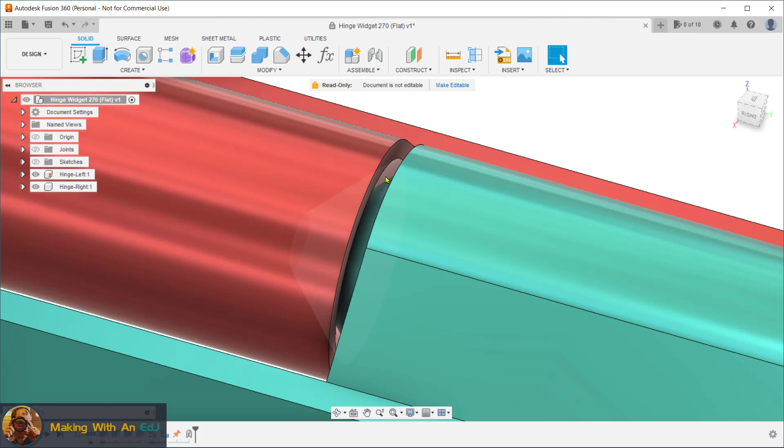The way I create the extrusions here does not actually maintain the full clearance we had set up. So the 0.5 millimeter gap we created at the top does not carry through because of how this extrusion works. If we zoom in and inspect it, you can see that even though we start with a 0.5 millimeter gap between the opening at the top, when we look at the space on our 45-degree angles with the extrusion and the cut...

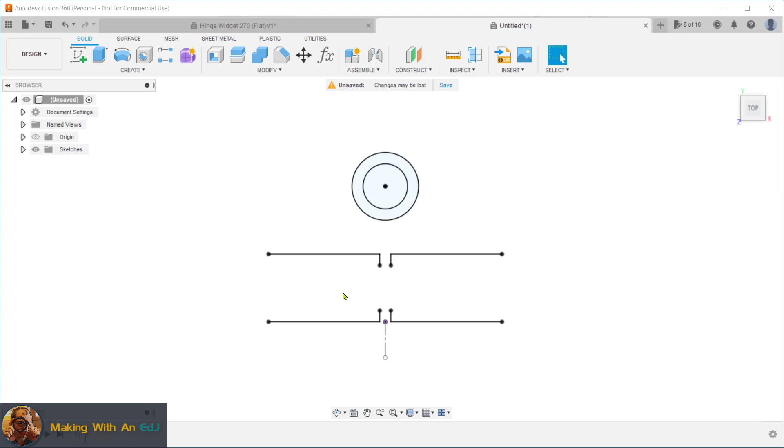Let me show you. I'll open a new design here and do a quick sketch to demonstrate. I've prepared a simple sketch to show how this works and what's happening with my original design. I increased the size to make it easier to see what's going on. So let me go in and edit the sketch, and I'm going to zoom in a little bit here.

So I mocked up just a 60 millimeter circle, like you remember from the other model. This is how we would extrude from this inner profile to create both the pin and the cutout for the hole where the pin would insert. Both of those were cut at a 45-degree angle.

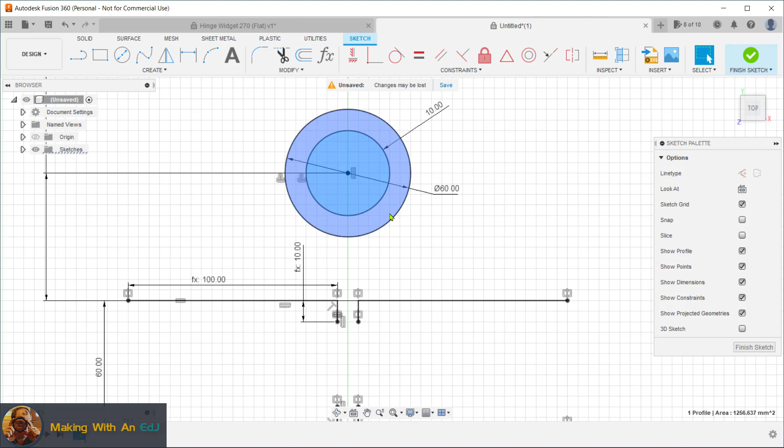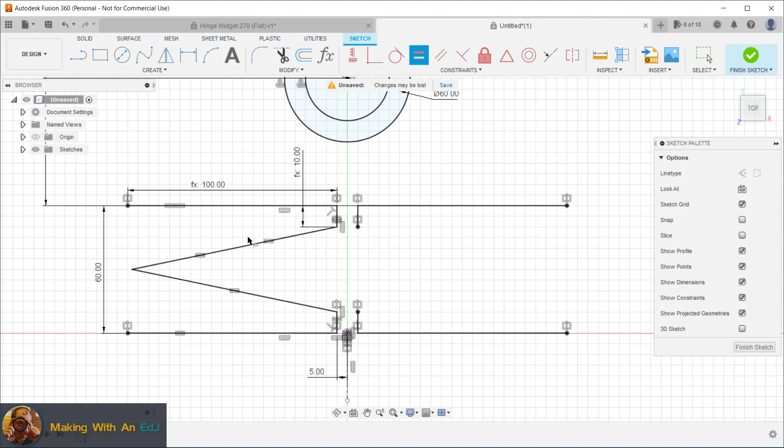So if we look at a side profile of what that would look like, I'm going to turn on the line tool and draw the cutout portion. I'm just going to draw lines here, and make these two equal. Then I'm going to set the angle to 45 degrees. There we go, 45 degrees.

Now you can see how it created - we have our 10 millimeter clearance on everything here. I've got a 10 millimeter gap created here, and a 10 millimeter inset on that face that matches the circle up here. So now to create the pin, the extrusion essentially took this inner circle, which would be from here to here from a side profile, and extruded it out, similar to how we made the cut.

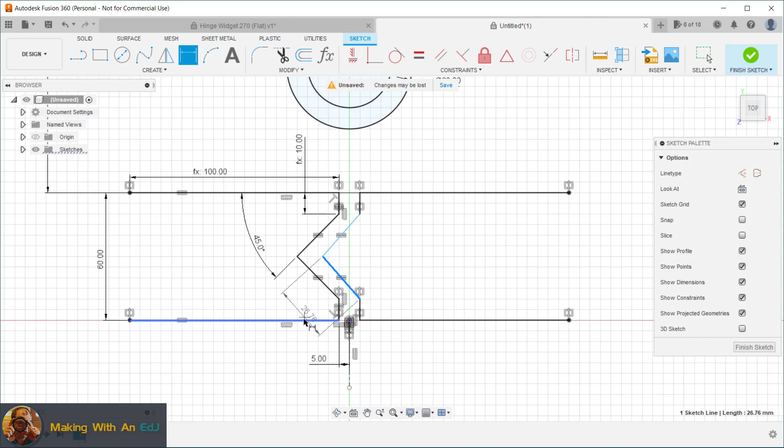So again, I'll constrain these by making them equal and dimension this angle. Actually, I'll do it down here this time, keep it a little cleaner looking. We're going to make that 45 degrees. If you notice, you can kind of see it visually because it's exaggerated, but the distance between these two points - I can turn on the inspect tool - is 10 millimeters. But if we look at the distance between these two parallel lines here, it's 7.071.

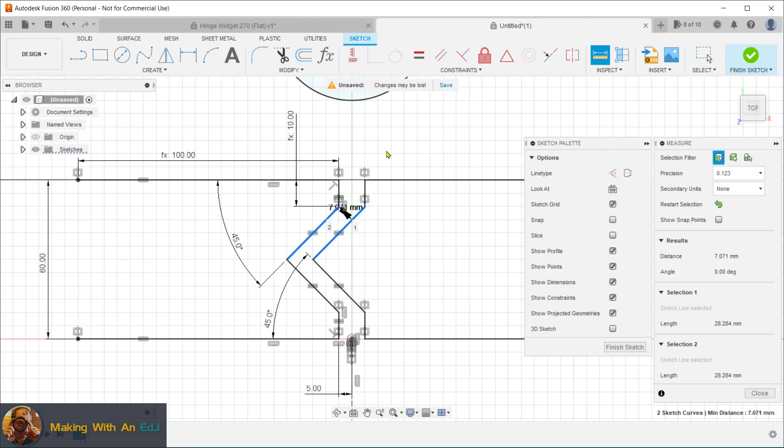So by doing it through this method, that's what's going on. The reason it creates the issue and doesn't maintain the 10 millimeter gap all the way through is that these two lines are parallel with each other. If they weren't parallel, then we could shift it a little bit.

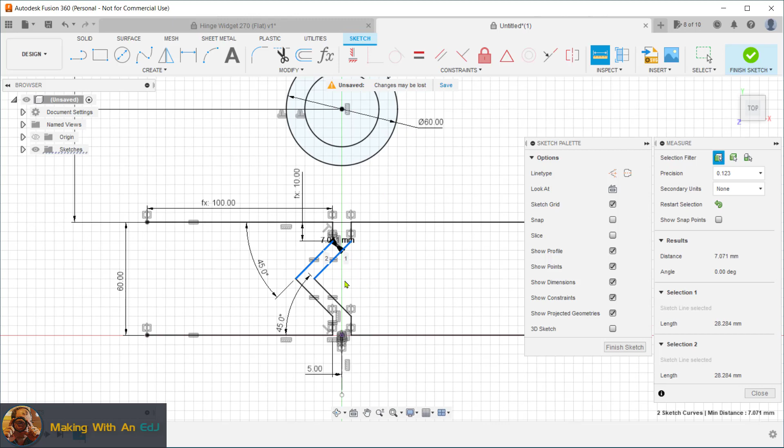Just to show you, I've got another demonstration to show you an alternate way to create the profiles so it maintains that 10 millimeter gap. But if you think about what's going on here, if I change... actually I wanted to make this the same as this no matter what.

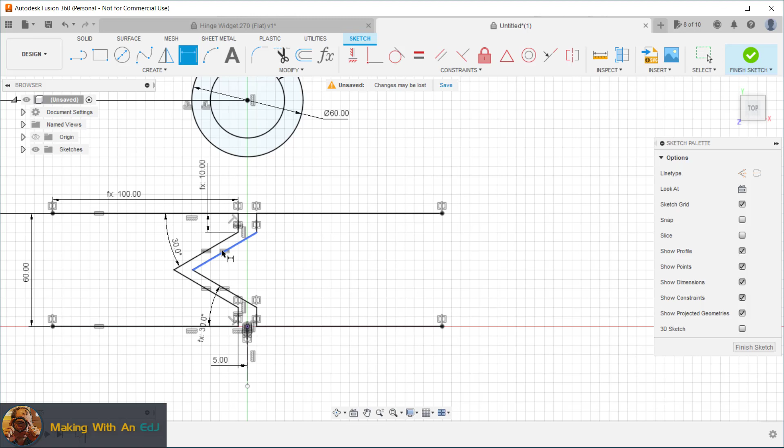So now if I change this dimension to say 30 degrees, watch what happens - the gap gets even smaller the sharper this angle becomes. If we inspect this one, now we're down to roughly 5 millimeters, or exactly 5 millimeters. If we take it down to 10 degrees, it really stretches it out, but you can see how narrow that gap's getting.

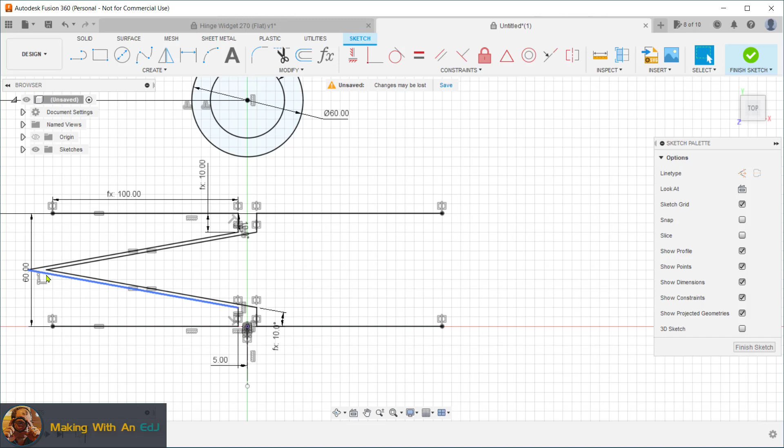So if you were to create something that's supposed to rotate in a 3D print, you'd never have success here. So the trick is to actually not use this method to create your hinge. There's a better way. Let me stop this and switch over to show you.

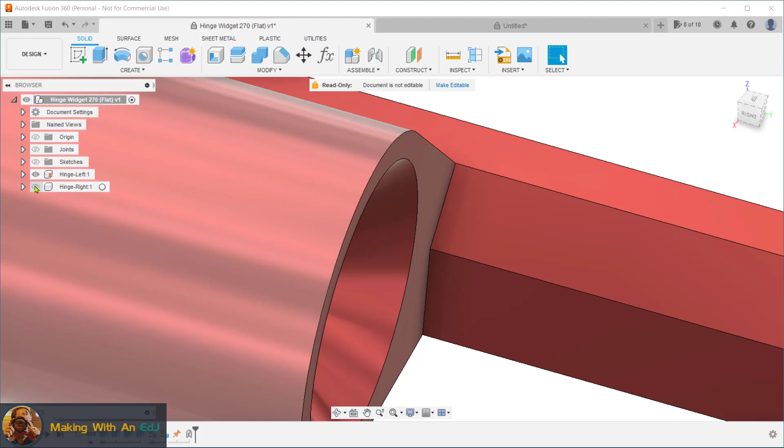So now that you know that, here's a workaround to quickly fix the model I demoed in my previous video. I am going to hide - which one is it - no, I'm going to hide hinge right here so we can see in here a little better. A quick way to fix this is to offset these faces another 0.15 millimeters roughly, because the gap is 0.35. So if we do a Q, which is press pull on the keyboard, and select that, it'll do an offset face. The other way to get in here is to modify offset face.

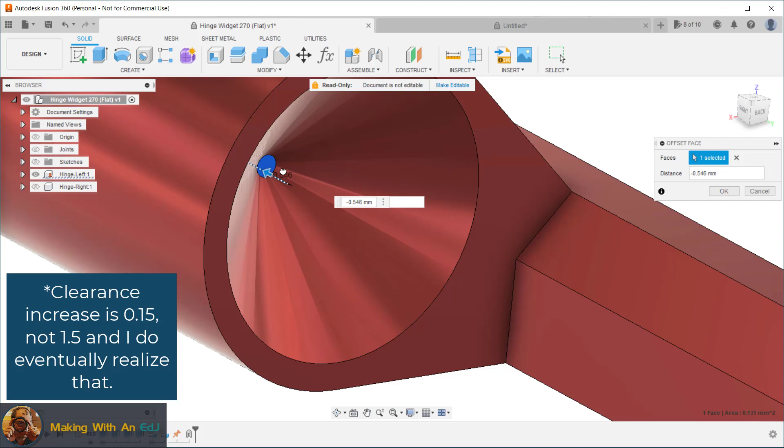I'm going to start with this, and push this in until it comes to more of a point - I'll do that negative 0.5, say. And then I'm going to offset this face negative 1... I'll do 1.5. Oops, positive 1.5.

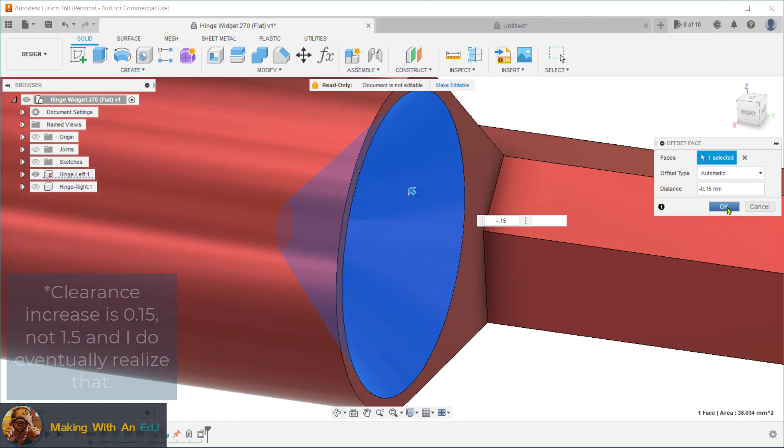Let me cancel that. Sorry, negative 0.15, not 1.5. There we go. Okay, so now if we turn our body back on here and inspect this, you'll see this face to this face is now 0.504. So we can get our 0.5 millimeter quickly that way.

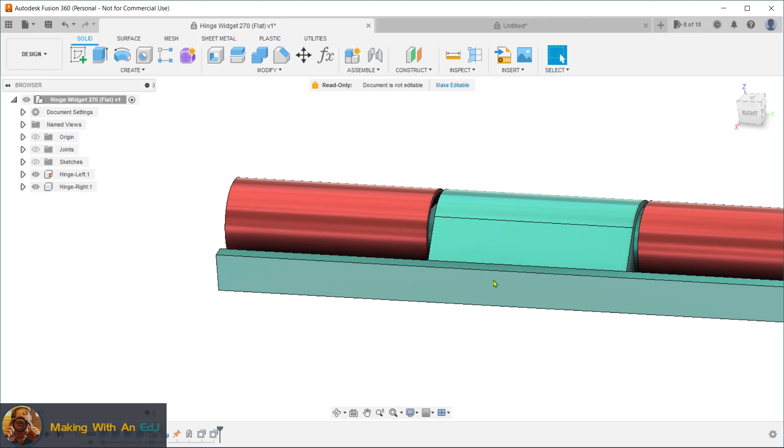It's been really fun, and we've been taking lately a deeper dive into hinges. I had shown this method I came up with for creating this hinge, where I created the whole profile for both sides and then just did the various extrusions.

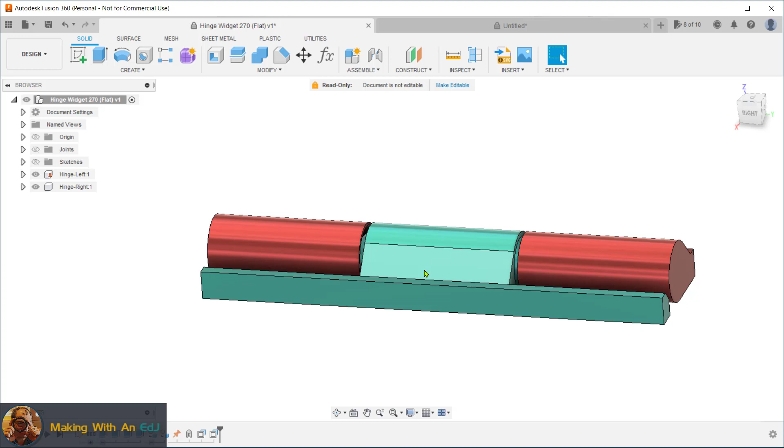In class, when he was demoing it, he showed us a method that I'm going to just show the intro to here, because he's already done a video demonstrating the technique he used to create a similar style hinge. The way he approached it was to start a new sketch on the XY plane.

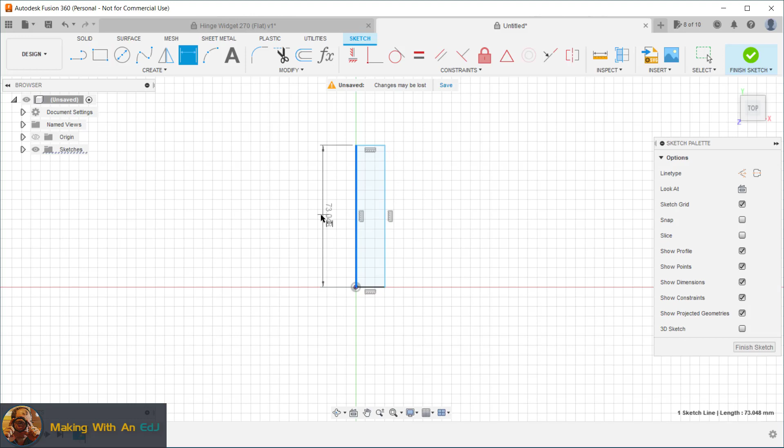If we draw a rectangle, I'll give it some dimensions here. Let's say this is 60, and we'll make this, let's say, 3 millimeters. Then he came in here and drew a sketch, and let me zoom in quite a bit here.

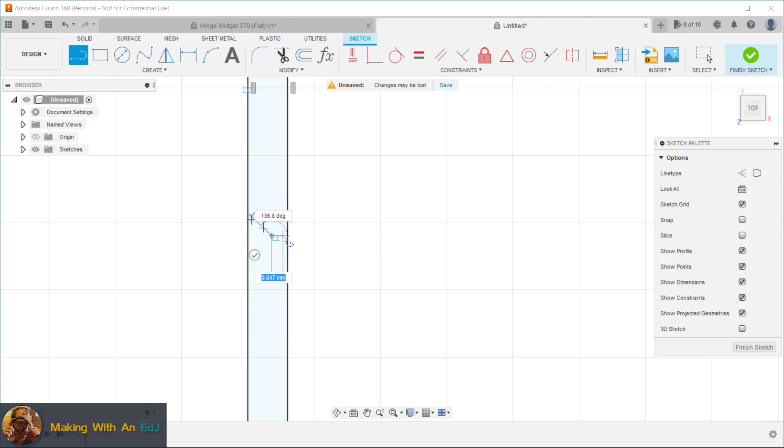So we do a line similar to what we just showed. Let me get up here. So we do our little line, we do our angle and our line over here, and put some dimensions in. Give that a 0.5. This is a 0.5. And we'll set our angle at 45 degrees.

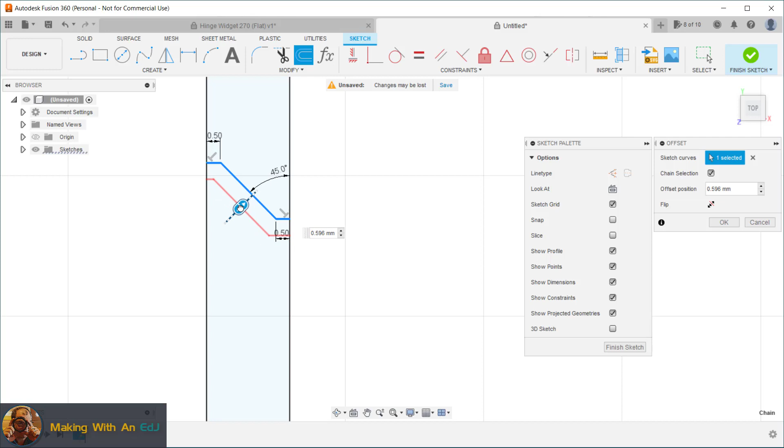And then we're going to do an offset, and we're going to do this at 0.5. This is similar to what I just showed you to create it.

And then the other thing he did - let's do a line and hold shift down to find the midpoint. Right there, we're going to draw a construction line at the midpoint so we can mirror this.

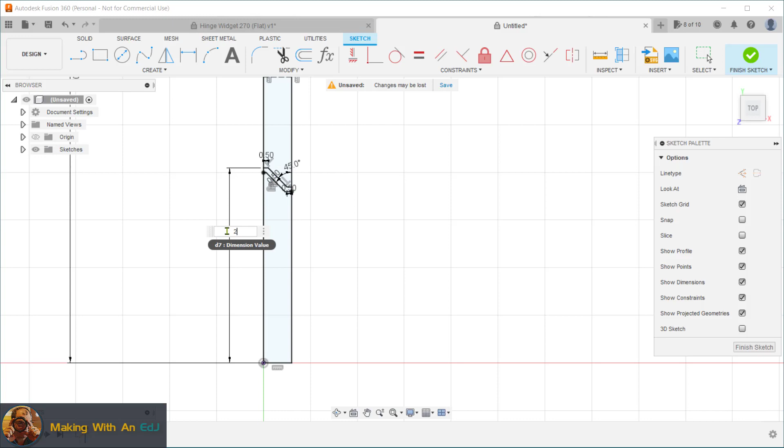Since I did 60 here, I'm going to make this about a third, so we'll make that 20. Now we're fully constrained, and then we're going to mirror - create mirror - our offset that we sketched, and then our mirror line is here, and say OK.

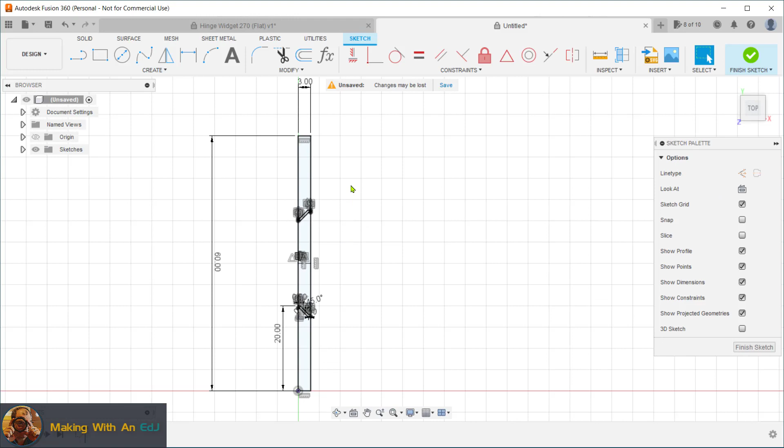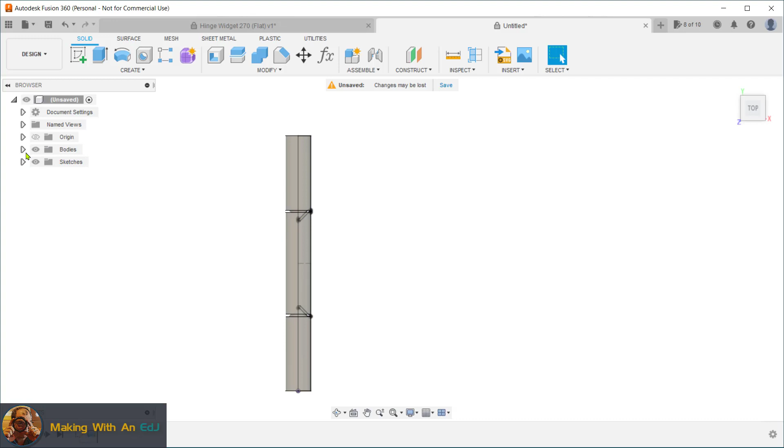So what he did to create the hinge was finish the sketch, and then we did a revolve - create revolve - and select the 3 profiles. So we have the 2 parts that make up the outside of the hinge and then the center. Then the axis is going to be this line here, the inner line. Then we say new body, say OK, and what we end up with is 3 separate bodies here.

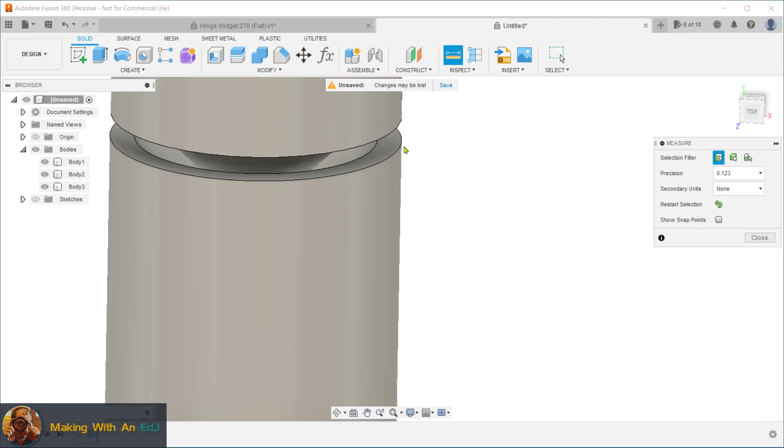I'm not going to get into the full detail of finishing out the joint here, but you can see how, if we hide the sketches, it created the same pin shape we were looking for, convex and concave. But if we check our distances with the inspect tool, we see we have our 0.5 millimeter gap here, and we also have it from this surface on the 45 degree angles - we've maintained our 0.5 millimeter all the way around.

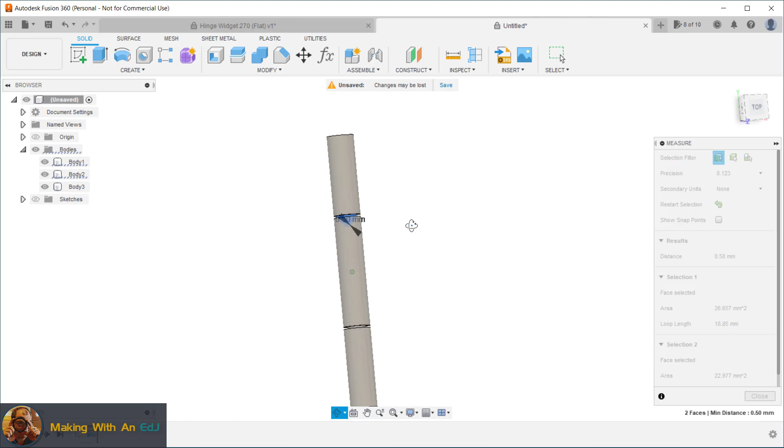So while both methods work, his is actually a little bit better and easier to maintain the 0.5 millimeter clearance, and that's not entirely obvious when you're using the technique I demoed in my other video. So I hope this helps.